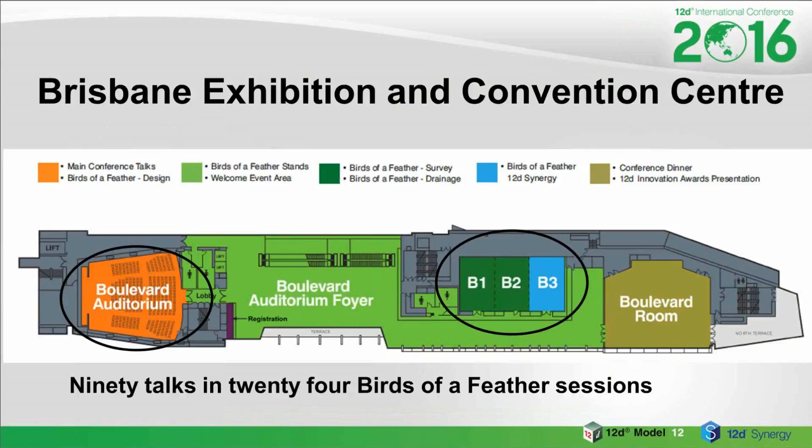And we had an exhibition area where we had a lot of people there - AECOM, BricsCAD, CR Kennedy, Matt Monk had a stand, Position Magazine, Position Partners, Transoft, UPG, SciTech. And then we had our own ones for people to talk about design, 3 waters, survey, and synergy.

We also went through what was coming in 12D Model 12, and I'll go through some of those things, and 12D Synergy 3. And a guest speaker, Dr. Alan Duffy, which I'll mention a bit further on - he gave a fantastic talk for a couple of hours, which everyone really enjoyed. We have a welcome event and the dinner with an entertainer, and our Innovation Awards.

So I'll cover a lot of these things just so you have a good sense of how it went at the conference. Our opening talk - we always try one that will appeal to everybody in the industry - and our opening talk this time was by NorthConnex.

And they were talking about the tunnel that they're working on, which had 2 presenters - David Mayers from Bouygues and Matthew Monk.

Now, what was NorthConnex? It's actually a motorway tunnel in Sydney, joining the M2 motorway with the Pacific Motorway. It's got tunnels and the M2 integration, so it's the longest and deepest road tunnel ever built in Australia - longer than the Eastern Distributor, the M5 East, and Cross City Tunnel all combined.

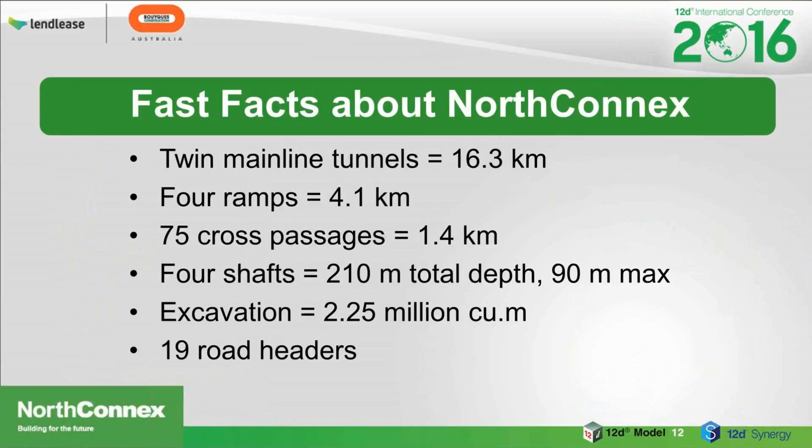There's twin tunnels, 16.3 kilometres, ramps, 4.1 kilometres of it, so a lot of cross passages, shafts, and there's 19 road headers on the project, which I think is the largest number ever in Australia. They've got 3 areas they're drilling out from, and the headers will all be going out to do the job.

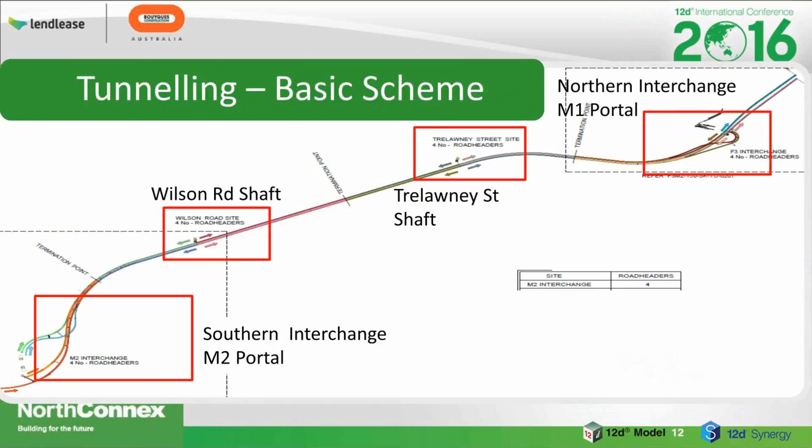They're then using that with 12D model, with 12D field, using the Toughpad, and 12D synergy as well to bring all the data together and upload the survey data, and bring it back in. So synergy was a critical part of their process.

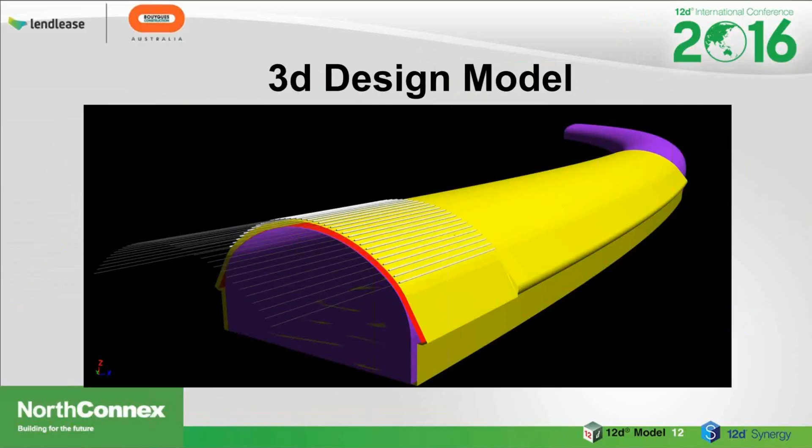This is actually the design they put together in 12D that they then could construct from. They built the whole tunnel inside 12D model using our tri-meshes and things, so they had some fantastic building of the tunnel, fully accurate, so then they could actually construct from it and compare to see how far they were off the design.

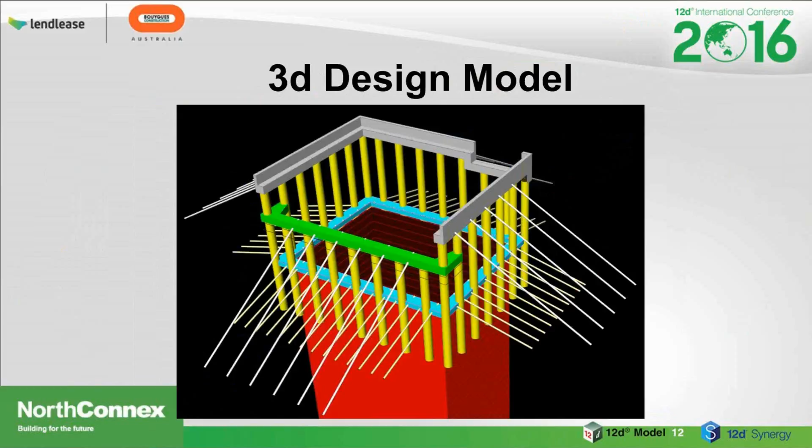So there's some images from them, from their actual talk. And here's actually the machines in action, where they are digging down there at the moment, so there's some action on site showing just the sort of size of it.

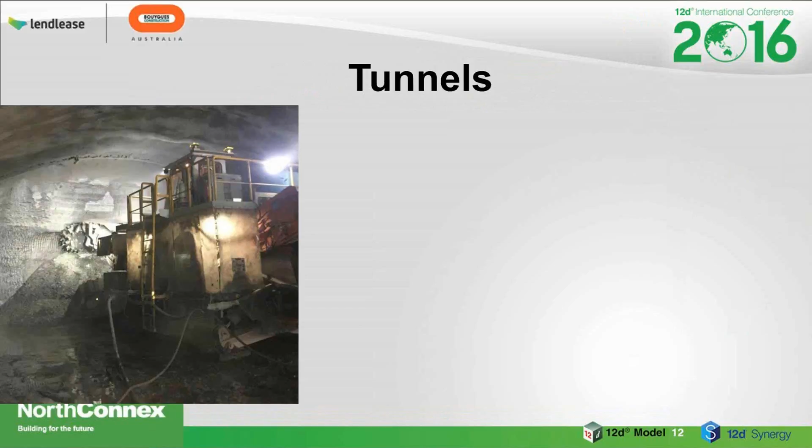And there'll be 2 passes of the tunnel - they're going through now, digging through once, but then they'll come back and dig down further again. So it's quite a massive tunnel.

So yes, that was our first talk. It was a fantastic one to have, and they will be using 12D synergy, not only just 12D model and 12D field, then 12D synergy to push out data. They're using new modules in version 3 that are coming with 12D synergy 3. So it was a very important part of their whole process.

So they were basically tracking data - they had every single point in their data management system of 12D data, full audit trails, everything there, which they were able to do. And they were doing live as-built models as they went along, so this data was being communicated and they were seeing exactly what they're doing live in the project.

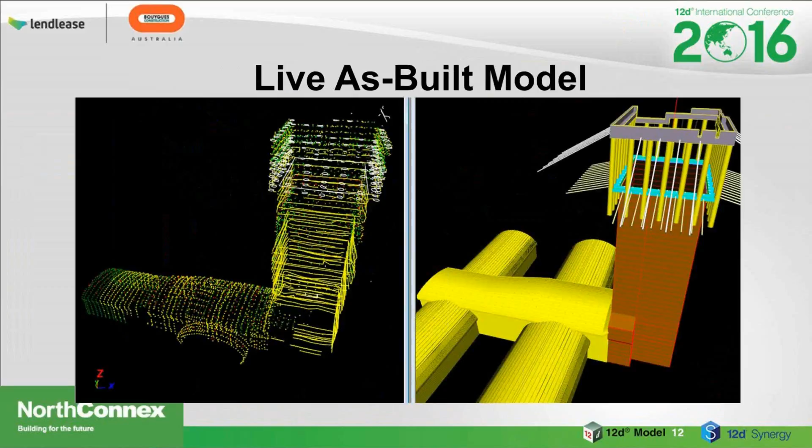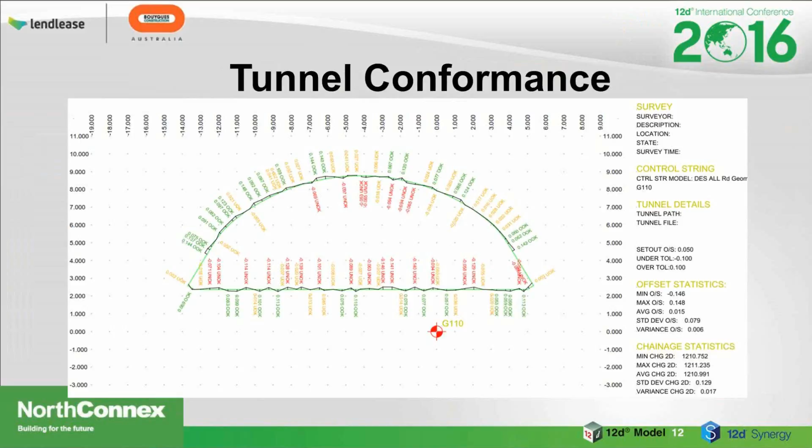So you can see there's tremendous data there, it's all in 3D. And then they'll be able to compare that with their design data to see if it was accurately being constructed. You've got tunnel conformance plots they're able to produce along the way, and just like rock bolt conformance. There was a huge number, 300,000 I think they said, rock bolts to be done, which all have to be mapped and placed. So it is a massive job.

Another area they did was heat maps. Heat maps doesn't actually mean heat, it's for giving data and showing data. In this case, taking the data and putting it into a 3D map, which I'll just show you one of, so you can look at things and analyze. So it's a very good way of looking at data. And they're also doing all those sorts of things with 12D model.

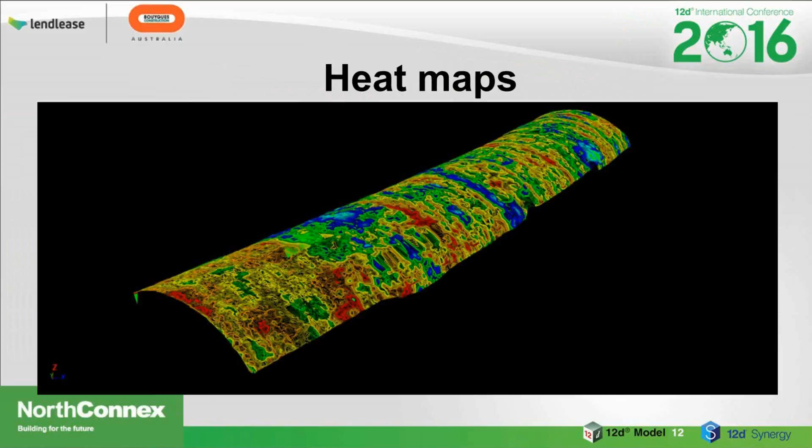The talk also talked about all the successes they had - basically the automatic data submission, offline collection of data, because although it was underground, they couldn't always be online, but they were bringing them together quite well. They had it all structured and usable data, and all the survey staff were able to use the same base data, and the data was current, live, and totally controlled. So all the sorts of things you'd like on a project. They had automatic output to others, eliminated double handling of data, and more decisions could be made in the field and less time in the office.

And because they need to get that information when the road headers have to stop so they can go in and collect it, the quicker you can get the turnaround, the quicker they can get in and start digging again.

So this is just a summary of their whole talk, but basically they developed industry-leading systems. There was nothing else in the world they've done. It was a totally integrated solution, flexible and customizable, and an easy way of analysing such rich data because they were doing scans of it all the time, so there's a huge amount of data.

So the heat maps and things made you actually be able to use it, and more work could be done at the work face. So they're trying to find clashes and problems before they have to pull out, so they could do it right there at the work face.

So they actually were totally trying to reduce dependence on manual processes, mining information from all their data rather than doing it manually. And for the future, they're looking to expand further automation, real-time reporting from the field, improved management of data, and to provide data-driven solutions. There's numerous tunnel projects in Australia coming up on the horizon, which this will be a fantastic model for.

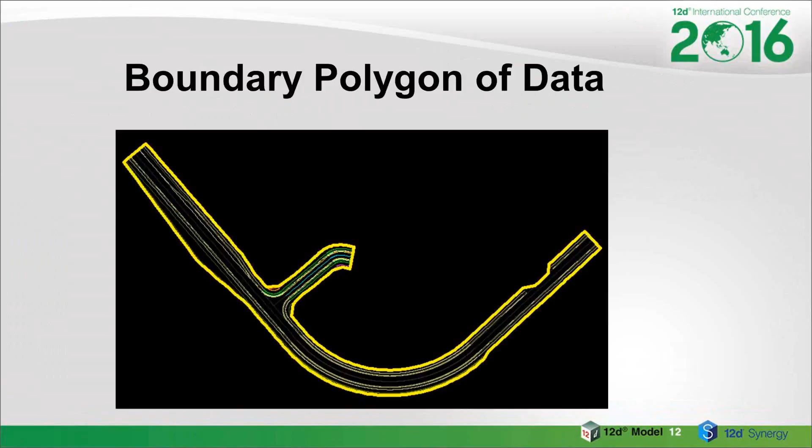With icons, we're finding out if you've got higher resolution screens or tablets, you often need bigger icons. You're allowed to set them separately for your toolbars or views, because sometimes you don't need them all to be bigger. So that's now available.

In dimensions, we've got style overrides for menus. The one thing with our dimensions and leaders before is that you had to change your style if you just wanted to change the color. Now you can have one style set up and then have overrides, say you want this to be a certain color and things like that. So you can really cut down on what you need for styles, for dimensions and leaders. And you can also put those things on toolbars, so you can set them all up exactly as you want them.

One thing everyone was excited about is what's called view favorites. What this is, is that for your view, you can pop up and it'll show you everything that's actually available on the view, and you can set them to whatever you like and write it away. You can come back later and use that to set that information, and you can also use it with macro languages in chains. So it does allow you to set up the views exactly as you want them when you create them. And when you create a new view, you can also use them. There's ones for plans, sections, and perspective views. So very exciting there for people.

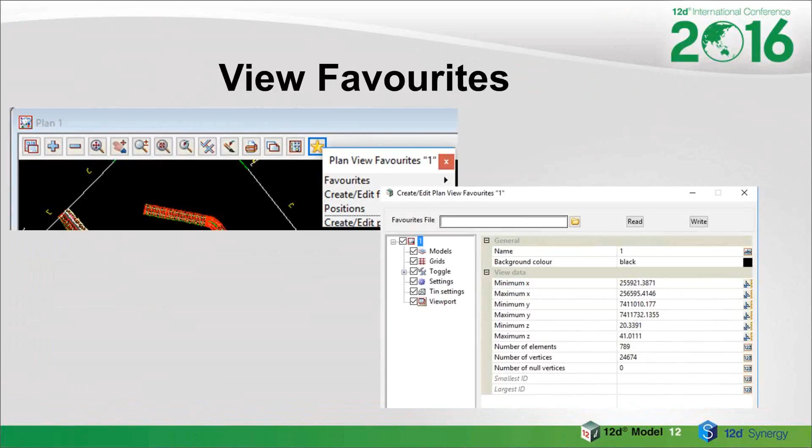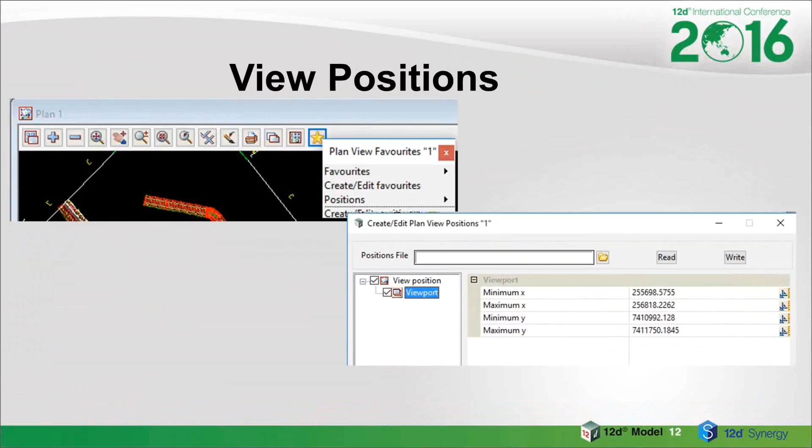And there's a similar thing, which is a subset of it, called view positions. In this case, it might be a perspective view where you know your eye and target, and so you can save that away, and then you just have to walk right on positions and pick that named position. So it really makes it easy when you've got data and you want to be able to come back to it in the future.

The attribute manipulator was actually released a bit of it with version 11, and it just uses string, vertex, segment attributes and properties, model and project attributes, so you can map them around, one to the other, which you often have to do when you've got attributes. You've got to get them in the format to go out to other products and things. And it's really helped people get stuck into attributes.

And we've also got one that actually labels string attributes and properties, so it's a bit like the label mapping file, except it goes a bit further, where you can say whether you want leaders or dimensions and set them up that way.

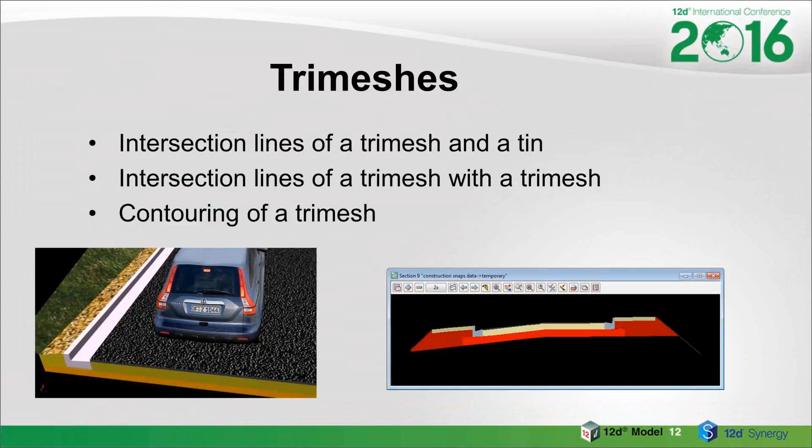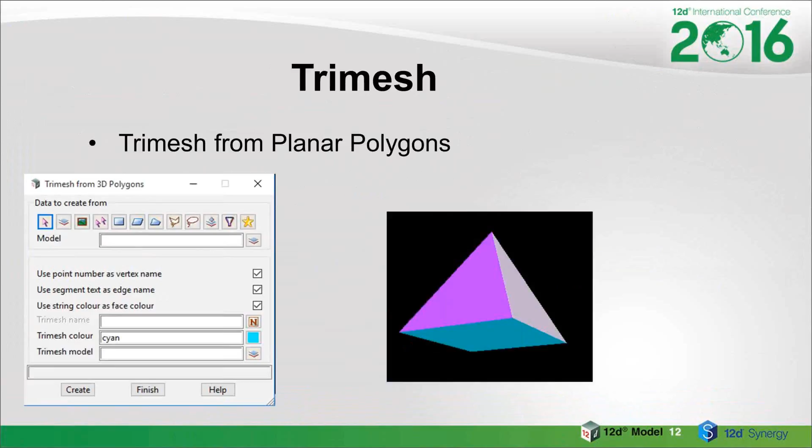Tri-meshes. Tri-meshes are now a fundamental part. They only came in version 11, but they're being used everywhere. We've added extra things like intersection lines of a tri-mesh with a tri-mesh, contouring of tri-meshes. And you can actually produce tri-meshes from planar polygons. In this case, you've got your faces of the polygon, of the pyramid, and put them in, and if they're all joined up properly, bang, you can make a tri-mesh. Very easy then to construct any sort of tri-mesh.

A lot of people have done tri-meshes, say, for a whole road. You're able to now split it, so then you can break it up. In this case, the customer wanted it into 5-meter intervals, and it can just split your tri-meshes up.

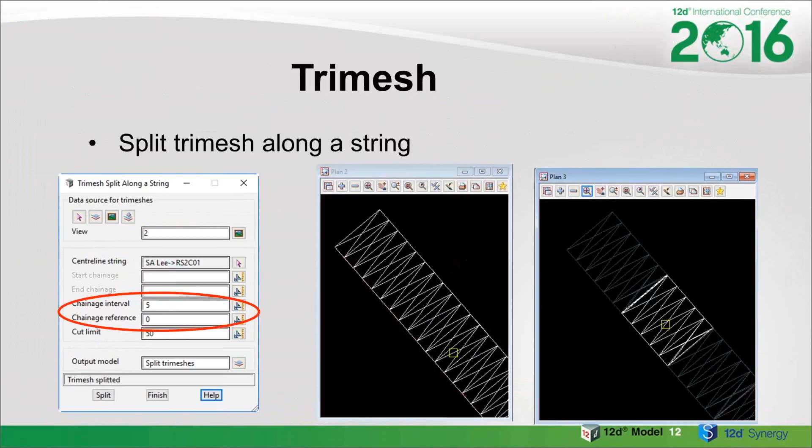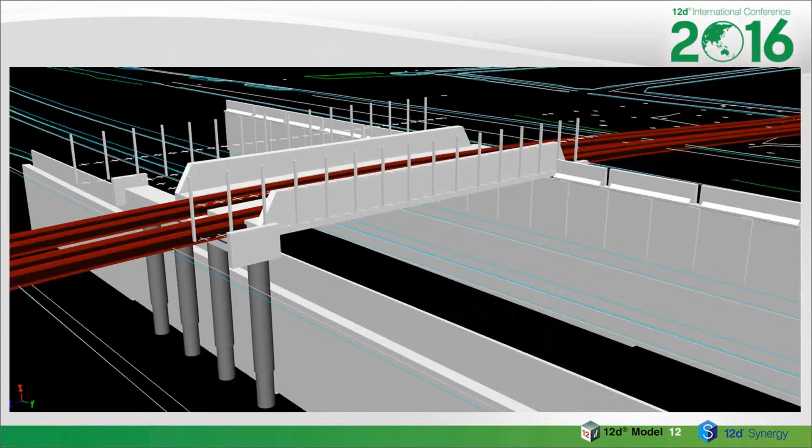The other big thing is BIM. Everybody's slowly trying to figure out what BIM is. We had a lot of examples of BIM and being able to bring data from other systems into 12D, so you could use all the power of 12D with your BIM data and creating BIM data within 12D. So we get a lot of fantastic examples, and a lot of the talks covered BIM type things. And once it's there inside 12D model, then you can do profiling options, all those sorts of things you're normally used to, and write it out to other systems.

And as we realize, the 12D model is a civil BIM system. 12D puts the word civil into BIM, because lots of it is missing. Our 12D XML is actually an open exchange format, and people can use that for civil data until the civil IFCs become available, because I'm on various committees for those civil IFCs, international committees, and they're still a little way off.

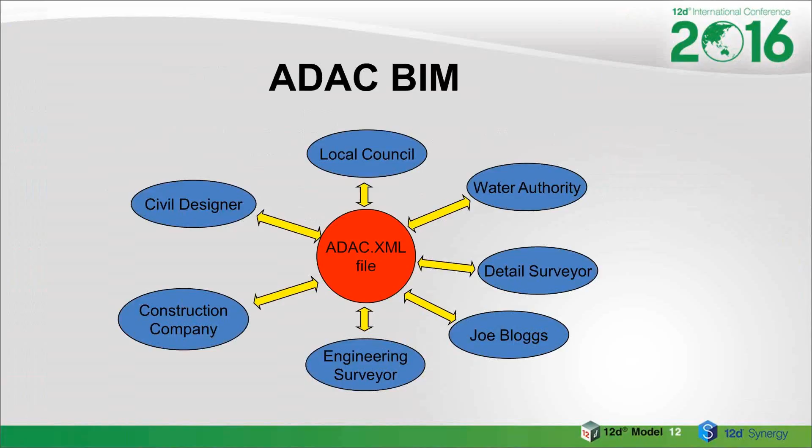12D XML has everything you need for your BIM data. We also had talks on ADAC, a BIM system that councils around Australia and water authorities have been using, and it has its ADAC XML file so you can pass data around. Everything's well defined with a data transfer format, an open format with open data, which everyone knows how to use to get data around. It was fantastic to see how well that's going.

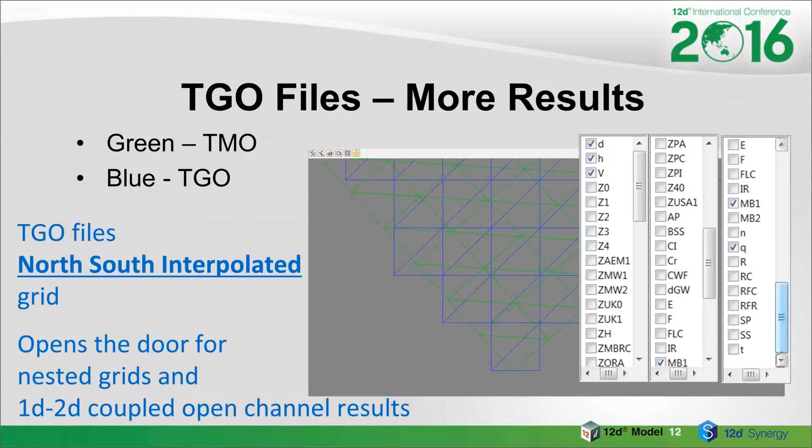We did a lot of work in Drainage.4d, covered in the birds of a feather session, things like the Drainage.4d Editor, which is now an actual editor rather than using a text editor. A lot of work with Drainage.2d about looking at the grids of your TUFLOW data so you can see what's going on, looking at the TUFLOW TGO files in different ways. Depth, velocity, hazards, water levels - all these things you can now use and see in the visualization. An example is the dam break one, which you've probably seen a few times. That's all now covered quite happily with 11 and 12.

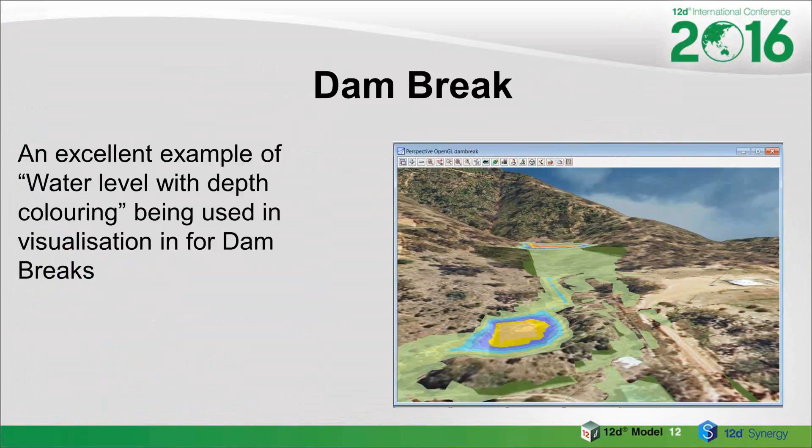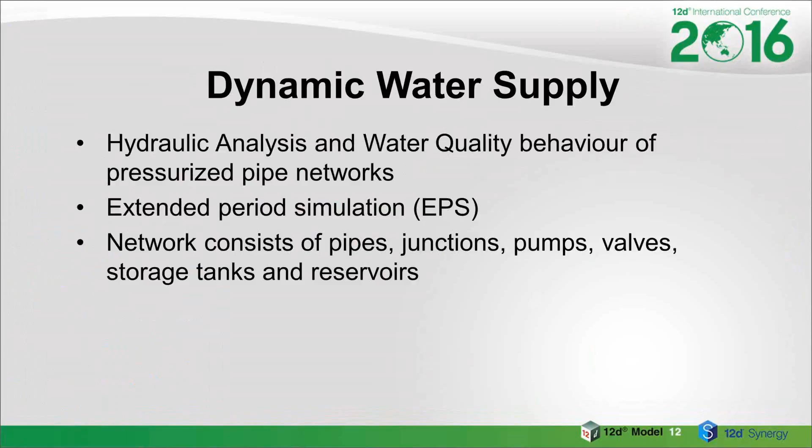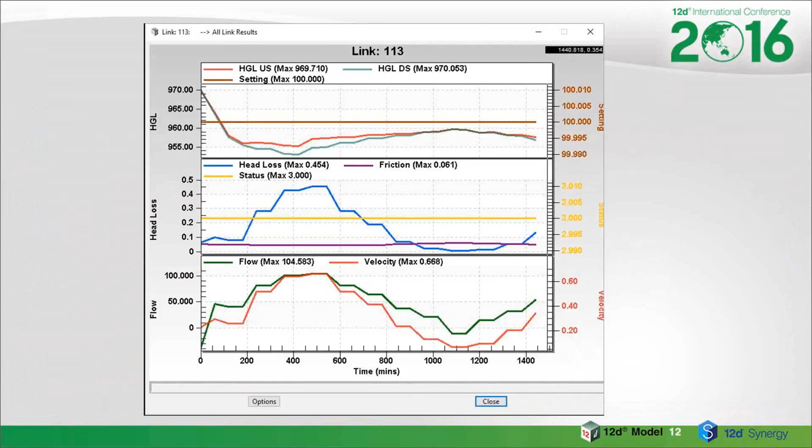There was a new module, dynamic water supply, that came in for the first time. That makes up our 3 waters - we've got the 3 of them. It allows for hydraulic analysis and water quality behaviour of pressurised pipes and networks, and can have an extended period simulation. You can have pipes, junctions, pumps, valves, storage tanks, and so on. So that's a new module for everybody, and you're able to see the results graphically, just like you can do with your dynamic drainage analysis. So that gives us the 3 waters now - we've got your drainage, 1D and 2D, the sewer which is the foul water, and the new water supply.

We had an interesting session in the Birds of a Feather on what we call the open sewer, talking about what people want now in the sewer side as well, to push it forward so it matches the other ones in sophistication.

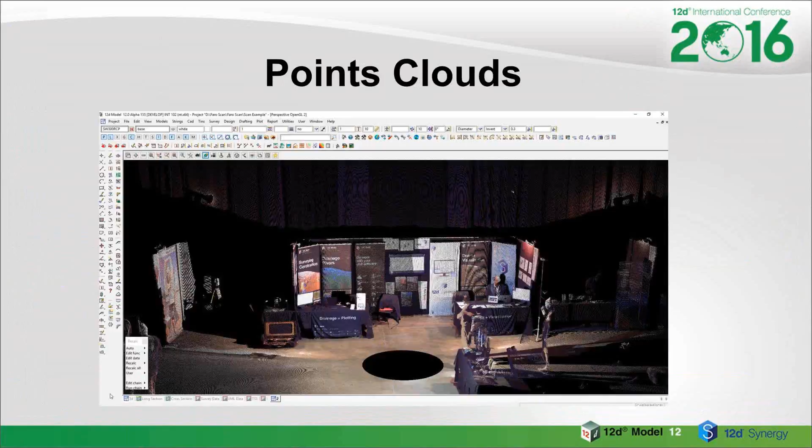Point clouds - a lot of interest in point clouds. This is a point cloud of our stand in FIG in New Zealand a few months ago. The main thing is how to control these point clouds and use them sensibly, and 12D's got a lot of tools there to do so.

Lots of new things in plotting for you. One thing is with PDFs that we showed, and you had in version 11, you're able to read in the vectors and text from a 2D PDF, and a lot of people didn't realise that if they've got such a PDF file, people can get data out of it. So in 12, when you write out to PDF you can say, look, I just want to do a raster, don't produce any text or vectors - so it's just to protect your data.

With the plotting with PDFs, we've got a multi-page plot sheet that can plot its pages to one PDF - I'll mention that shortly. But you also can combine lists of PDFs into one PDF. So if you've got a lot of cross-sections, a lot of long sections, it'll join them into pages of the one PDF. So any PDF you can merge together. We've added a lot of extra things to plotting.

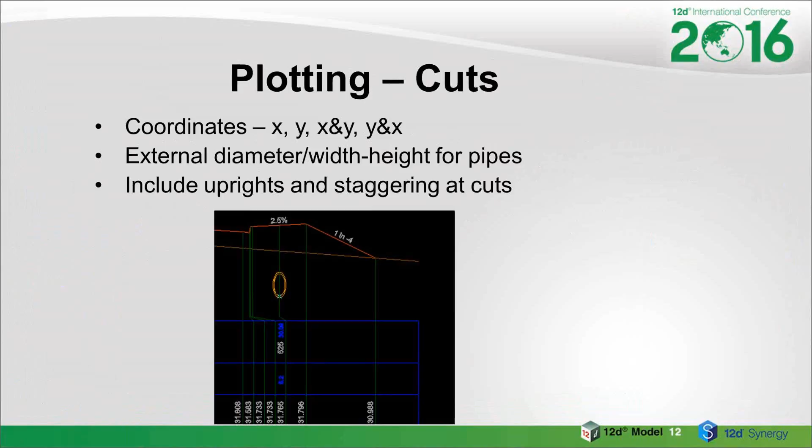PPFs - I get a bit confused there between PDFs and PPFs. These are plot parameter files, and things like with cuts - a lot of them have cuts. You can label X, Ys, X and Y, Ys and X as before. We also can have the external diameter for the widths and culverts for pipes - we had the internal before, but now the external. And when you actually label these things, you can include the uprights on them, but also stagger them, so you can put the thing down in your boxes and it will stagger with them. That's something before you could only put into position.

We've got grids on long sections and drainage long sections and cross-section plots. You can label strings and corridors, so if you've got a string in the corridor, you can see it, but now you can label information about it - the chainages for long section, the offsets for cross section, heights of the things, the diameters, whether it's round or culverts, coordinates, a whole lot of labels you can put in there: string, model name, string and model attributes, and you can put symbols. So you can label them just like labeling cuts. Most of that same information you can now do and more for things in the corridor.

With the long sections, you can now actually have a fixed height to your long section, which will create datum breaks - it does auto datum breaks. So you say, look, I want a certain height for my thing to be, and it'll automatically do the datum breaks for you.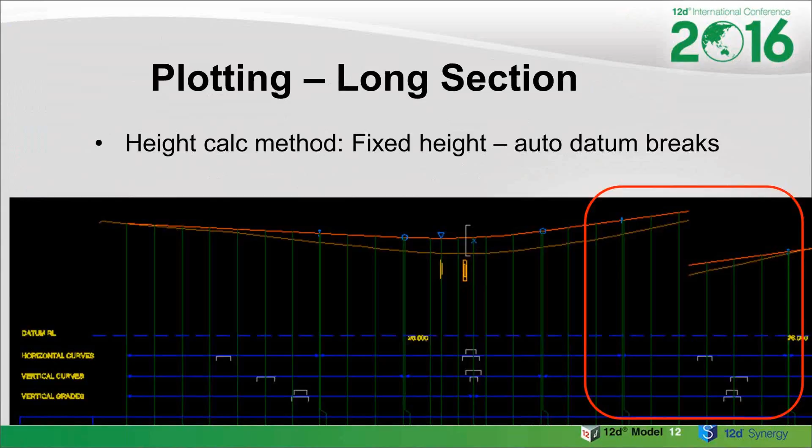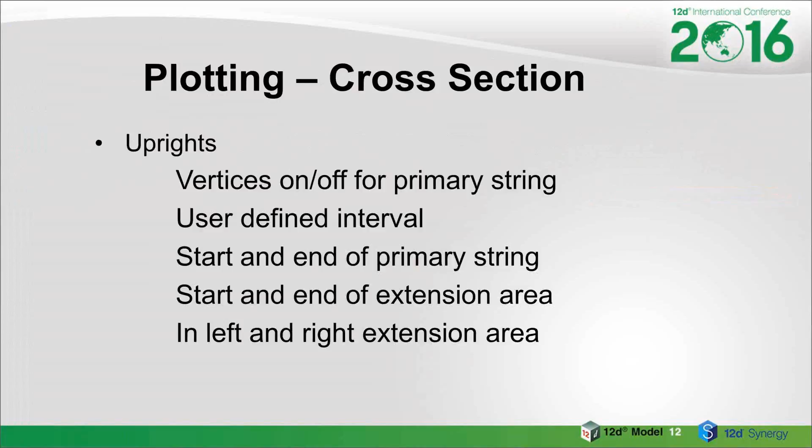With the cross sections, where before you could only have uprights at the primary points in the strings, you can now turn those on and off, and also define user-defined intervals. Especially for natural cross sections where you don't want every point where you've done a cut labelled, you can now say you want them every 5 metres. You can have the start and end of the primary string, start and end of the extension area, and put it out into the right and left extension area, which we couldn't do before.

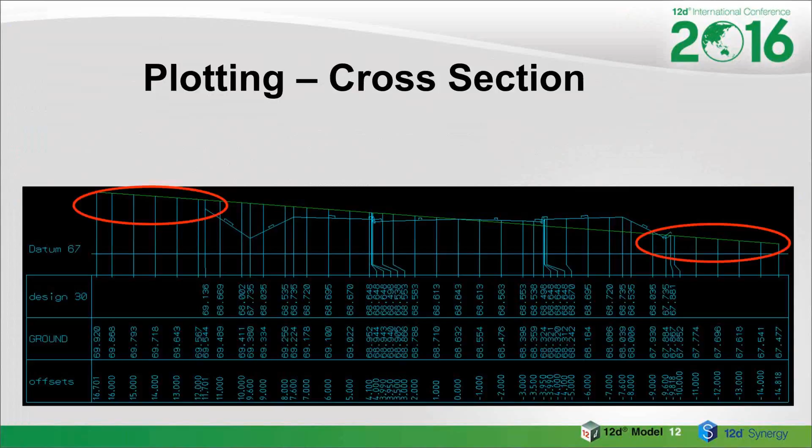So in this case here, we've got our cross section, and we've gone and labelled it out into the extension area, left and right of the primary string. You can see in those areas, which you couldn't do before, and they're regular here because there are no points out there anyway - this is where it uses the interval to do it. In this case, same thing, but we've turned them off where they are at the string and we're just using intervals. So all these choices are available.

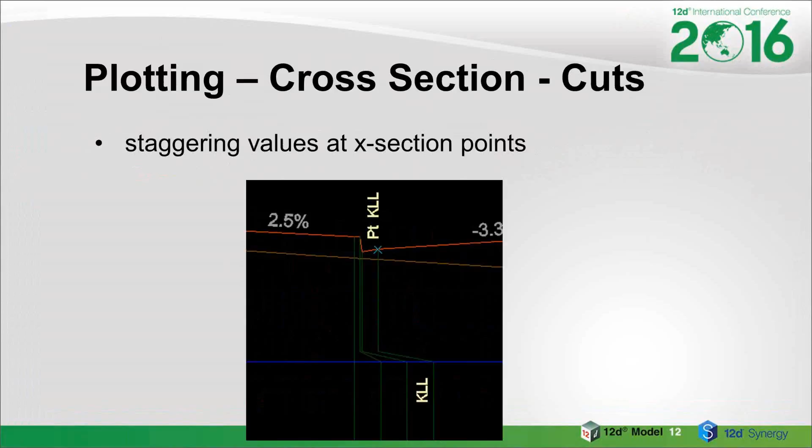With the cross-section points, across the cross-sections they actually have names. We can do what we did with the cuts now - you can stagger them and place them down the bottom.

E-plan. E-plan's something that's been in New Zealand for quite a while, for over 10 years, but it's now coming into New South Wales, Queensland and Victoria, and we've had companies actually put E-plans in both Queensland and New South Wales, and they're moving towards it in Victoria. So we're working with all the groups there. It'll be a slow slog, but bit by bit it's coming, and I think over the next 3 or 4 years everyone will start using E-plan.

So this is where the surveyors are putting in data. Instead of putting it on a drawing, it actually goes through an XML file, so it's all there again, so everyone can mine the data. It's eliminating any sort of plots for that - it'll all be totally through the E-plan XML file.

With volumes, we can do tri-meshes. We can work out the volumes and areas, and we can also break it up by chainage interval. So if you've got a whole lot of long tri-meshes making up all the pavement layers and things of a road, you can then get volumes through it just like you would when you used to have cross sections. You can say how you want to break it up and do it.

With chains, lots and lots of extra things in chains. They're probably the thing everyone is now using in 12D model. So we'll just keep improving it for you, all sorts of things you can do in chains just to make them more powerful. As people want things, just let us know, and that's what we add in for the next version.

One thing I jumped over briefly - you can actually now compile chains. What that means is you can compile them so you can hand them out to other people and they can't actually modify the chain. It's very good when you've got standards and you want people to follow them, and you don't want them to go in and fiddle with the chain. You know exactly what they're running.

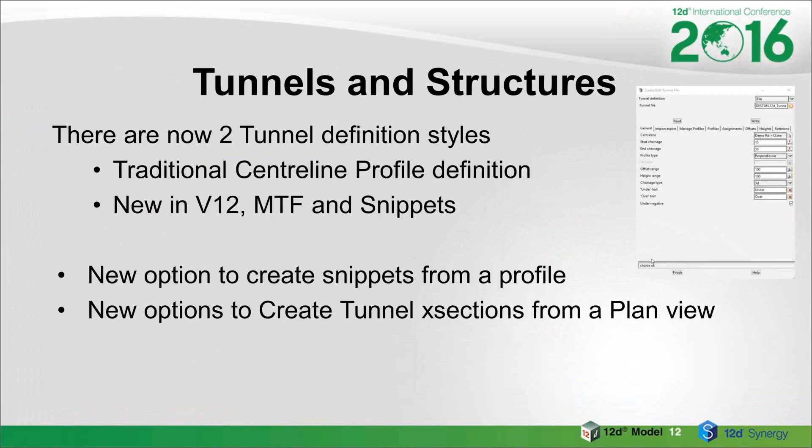Tunnels and structures, very important. Before, we were able to do tunnels, but you basically defined a profile and changed between profiles, much like the old apply. In version 12, you're allowed to do most of it from the MTFs as well, using snippets, so you've got a lot more power now. You can produce tunnels and all sorts of complications in tunnels from your MTF file, just like an ordinary road design, so tunnels are now fitted into our MTF system.

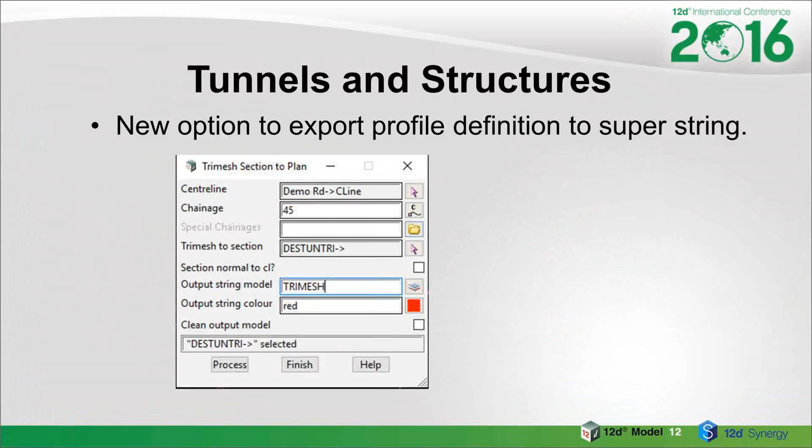There's all sorts of options in there too, to just take a tunnel, a trimesh, section through it, and produce a profile normal to the center line.

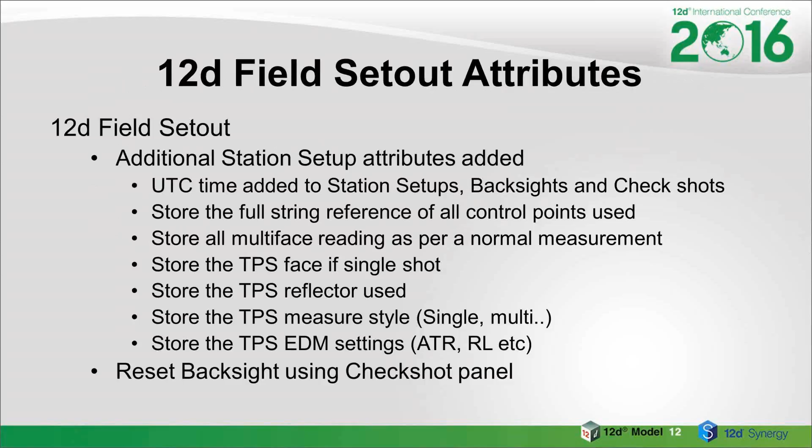A lot of work on the network least squares adjustments with scale factors and various point managements and azimuths for network array. That leads into 12D field set out itself, which now has least squares in it as well, plus a lot of additional information you can see and show. We just continue to improve these products for you.

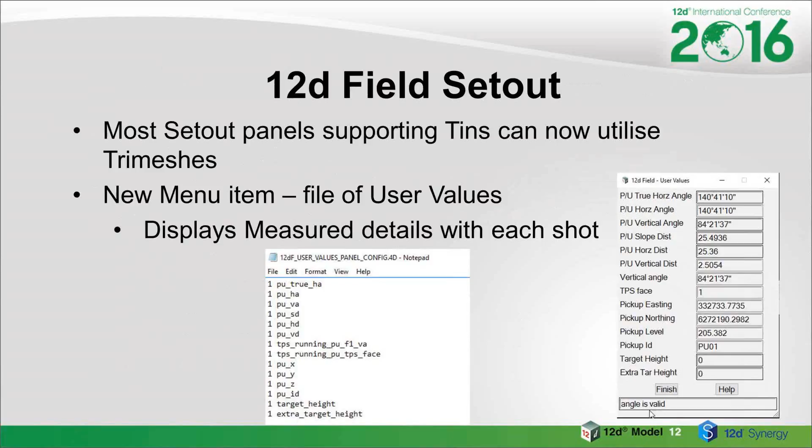So certainly get onto your people who are using 12D field set out. We'll have webinars on these once 12D goes out about all the different things that are available.

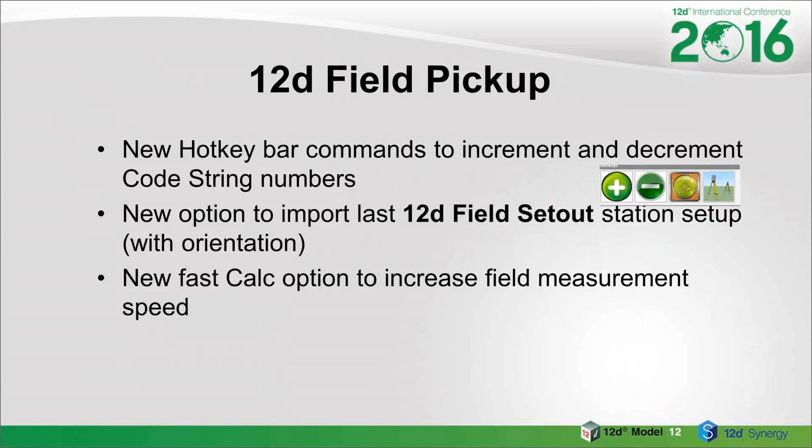Pickup is now starting to come into its own. There's a whole lot of hotkey commands, and we've got bigger icons there and special icons, plus a whole lot of things for setting up files. And we've sped up the calculation, so it's much faster for you to run.

With pickup, there's a lot of toolbars and things available, because on those tablets you just need bigger icons to make your sequences much faster. And of course attributes are becoming so important now, and pickup is fantastic for picking up attributes.

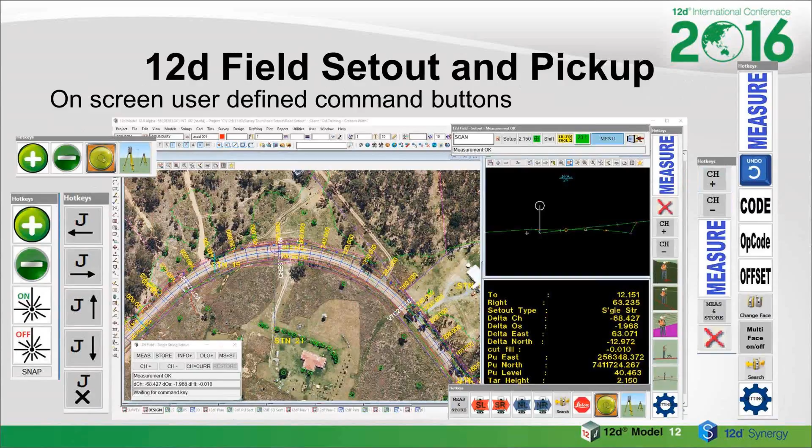The 12D field tunnel saw a lot of work, and as you can see with our main talker, they were doing tunnels, so this is where a lot of this development came from. So a lot of extra work now for tunnels.

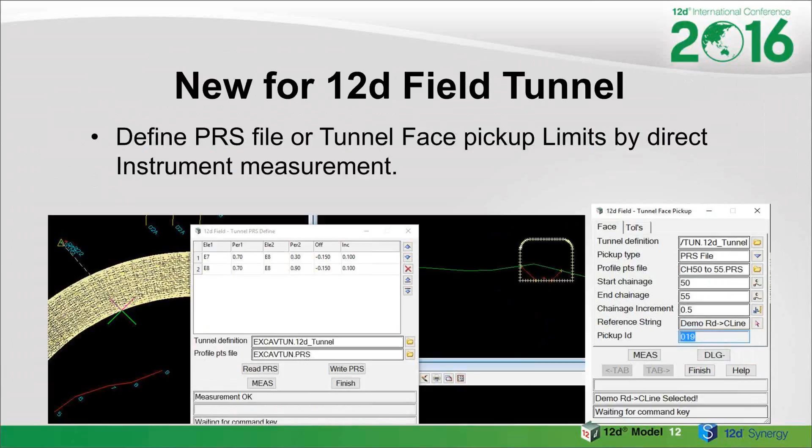Being able to pick them up in all sorts of ways, things like the new Leica MultiStation MS60, using that to pick up data - we're using those on things like tunnels where you can pick up lots of data and then pull out what you want. That's the problem with point clouds and scan data: being able to selectively pull out what you want rather than billions of points you don't need.

A new thing for 12D is we now have a new Trimble connection which will allow people to hook up to their Trimble S-Series instruments. Before it was only the Cytec range, now we can do the S-Series. We've tested the S6 and the S8, with others to come.

We can use either cable, direct Bluetooth, or serial radio, and basically you can use any tablet with Windows 7 or above - it's not restricted to just some Cytec tablets. The full instrument functionality can be managed from the tablet, so everything we can do in 12D field, we're now able to do with your S-Series Trimbles.

A few other things we hadn't announced before: with RoadFlow, there's going to be a 30,000 point version that you'll be able to test out, or it will just come as part of our 12D model base.

It was said it would be nice if you could check - a lot of people have problems with duplicate names in super alignments, MTFs and things. So yes, in version 12 there will be a feature to do that. We'll check all that for you and give you a warning, with a whole lot of settings on what things you want to warn for. And when you've got your super alignments, you have all these dependencies on other things - what do you do about that?

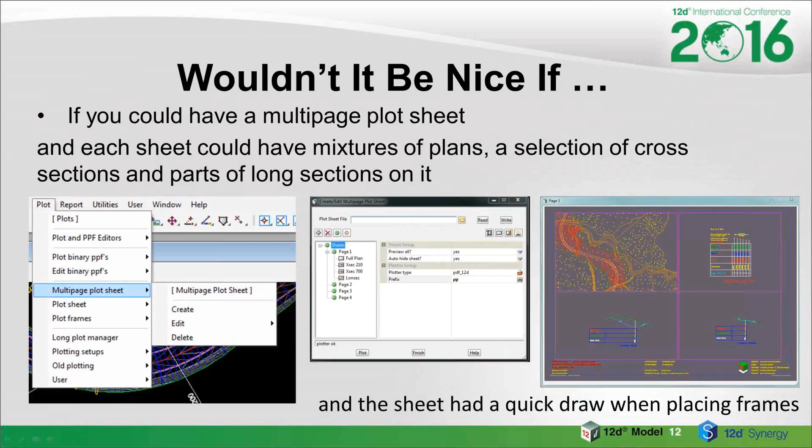And that's all, of course, in 12D Model 12.

The Super Inquirer - people have asked for an inquirer that you can configure for what it's going to come up with for different string types, and yes, that will be coming in 12D Model 12. So you can set what you want for a drainage string, different to a sewer string, different to a 2D string or a 3D string.

People have been asking about a viewer, 12D View. Yes, it is available and will be with 12D Model 12. It'll be available free of charge for people who have 12D Model running straight away, and others can register to be able to use it. So it'll be able to look at all our 12D Model data. 12D View, as it's called, will be available with 12.

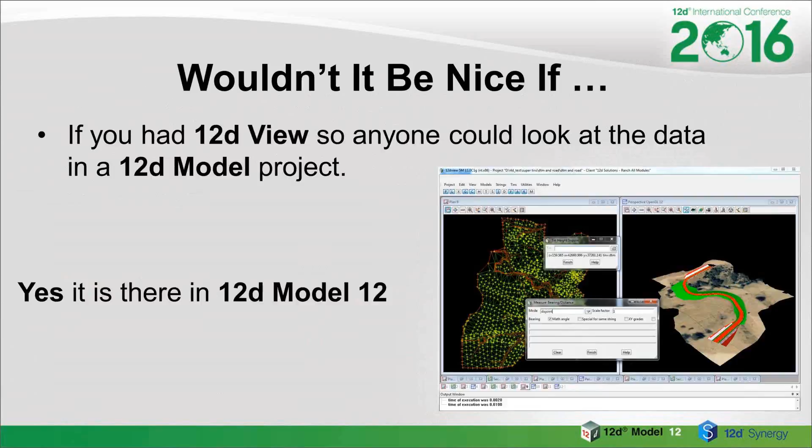One thing that we showed a little bit, but will be coming during the lifetime, is if models and tins could be organized like folders, as in an Explorer. Yes, this will be coming during the lifetime of 12D Model 12. It allows you, once you get stuck in so many models, to group them together and handle them, so you can add them onto a view or things like that all as one group.

What's the release schedule for 12? Well, all the people who were at the conference and are on maintenance now have access to the technical preview versions of 12D Model 12, and this is the final beta stage. Once that's finished, we're trying to get as many people to try it out so that everyone at the conference can get the technical preview version, and the release will be in September. That'll give us a chance to look at that feedback, so 12D Model 12 C1A will come out in September - it's not far away, it'll be coming very shortly.

The conference dinner - everyone enjoys that. Again we didn't have the 400, we had about 320, I think that's all the room holds, 330 people. It was a tremendous night. We had an entertainer there - this time it was Peter Berner. A lot of you might have seen him on television, so he was very entertaining and kept everybody laughing.

And we presented our 12D Resellers of the Year. For 12D Synergy it was 12D NZ - they've been doing a fantastic job over there selling 12D Synergy, and James Irwin, pictured there, just runs around flat out all over New Zealand. And for the 12D model itself, it was Extra Dimension Solutions, EXDS - that's Tony Ingle, the Managing Director there, and again they're doing a fantastic job selling 12D model in New South Wales, ACT and South Australia.